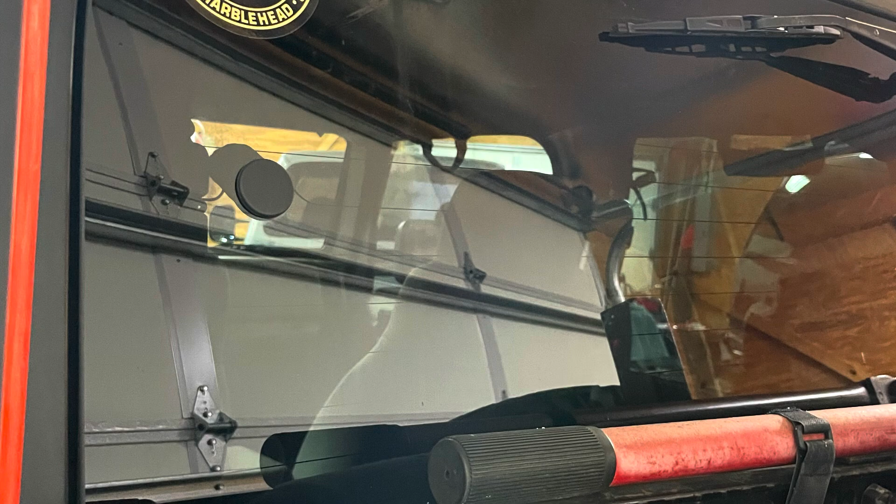Back out here in the garage. Some stuff came in the mail, so gonna get to work on some stuff. All right, here we go. Well, not stuff we're working on, but definitely putting that sticker on the Jeep here shortly. There's the perfect spot for that sticker.

All right, enough clowning around. Need to try to get a little organization going on here. Got like 3 projects on the workbench. Well, yeah, we'll call it 3. Gonna be getting the tank up here soon. So yeah, make some room to pull the tank off and put that up here somewhere. Yeah, see, it's getting better.

The key to disorganization is just continually push stuff down the bench. And the more you push it and just consolidate down there, you'll have some space to get the fuel tank up here. Yeah. Another organizing tip, keep everything in the same area. Got some diodes here. Lots of electrical stuff in here, so just kind of place those in there. And you're good. All right, enough yakking. Get that fuel tank off.

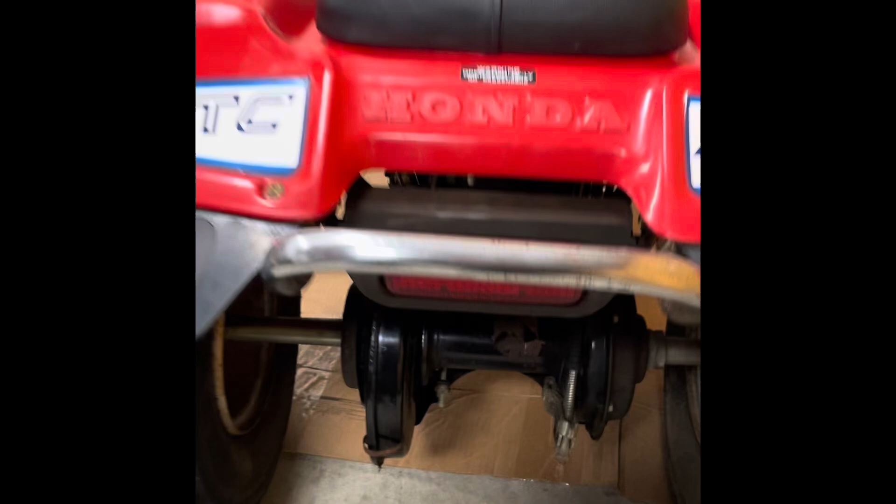All right, here we are, 185S time. Let's see here. Good cardboard in case we get a little fuel on the ground or whatnot. Anyhow, let's get the tank off. You got to pull the seat and fenders. There's a little lever there, and you give it a tug, and the seat and fenders shall come off. All right, there we go. Fenders off.

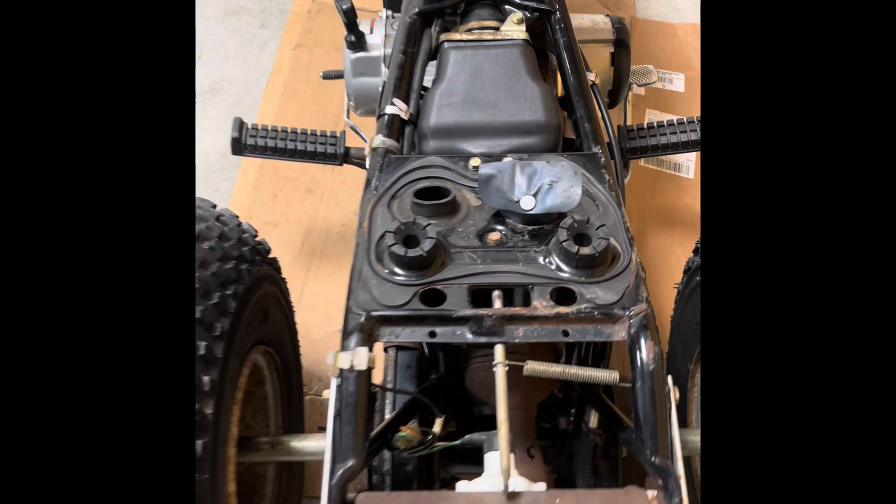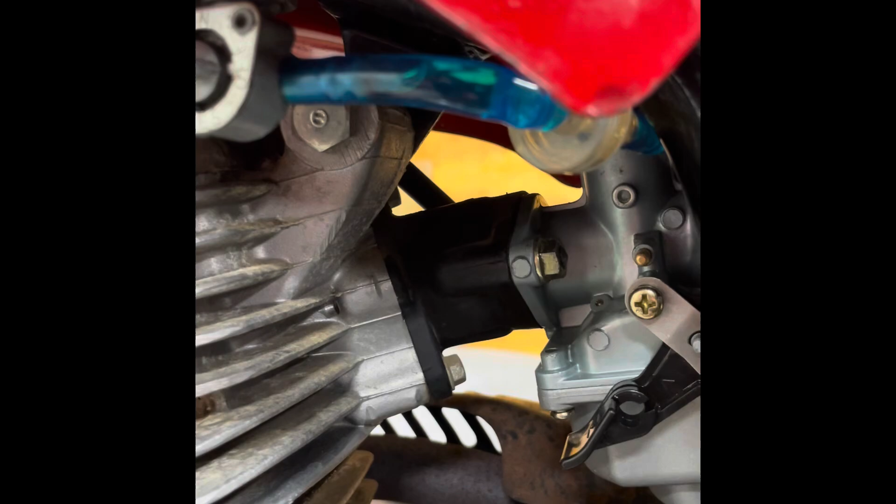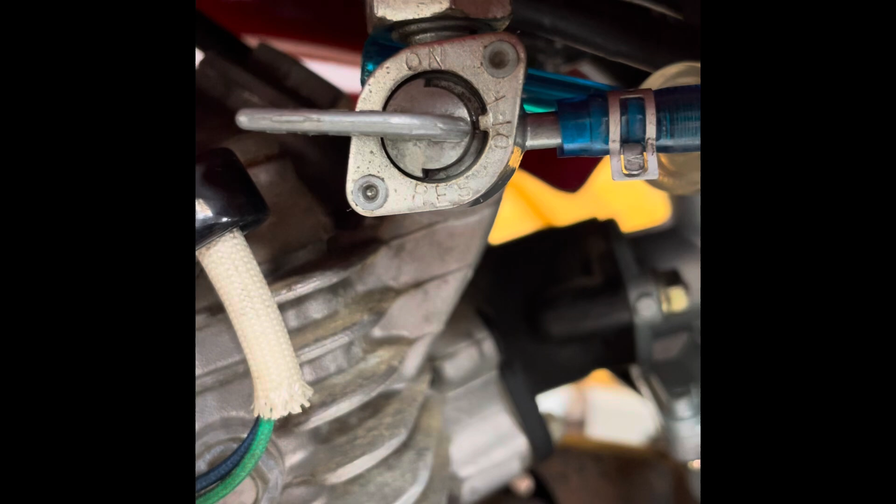Just a little mechanism there, got that bolt and fuel line going to the carb. Not a whole lot to it. All right, plot thickens. The off isn't really off. It's not shutting the fuel all the way off. So I usually like keeping the float bowls dry. So of course I cracked the drain over there from the float bowl and fuel came out because off is not really off. See what I'm saying? Yeah, got to take a look at that.

All right, 10 millimeter bolt is out. Should just slide right off here. Well, here we go. Got an old oil bucket cleaned up. Good enough for putting that fuel into the plow truck. I'll take that petcock off once I get all the gas out, see what's going on. Planning on doing the valves, so a little sidetracked here. The unexpecteds.

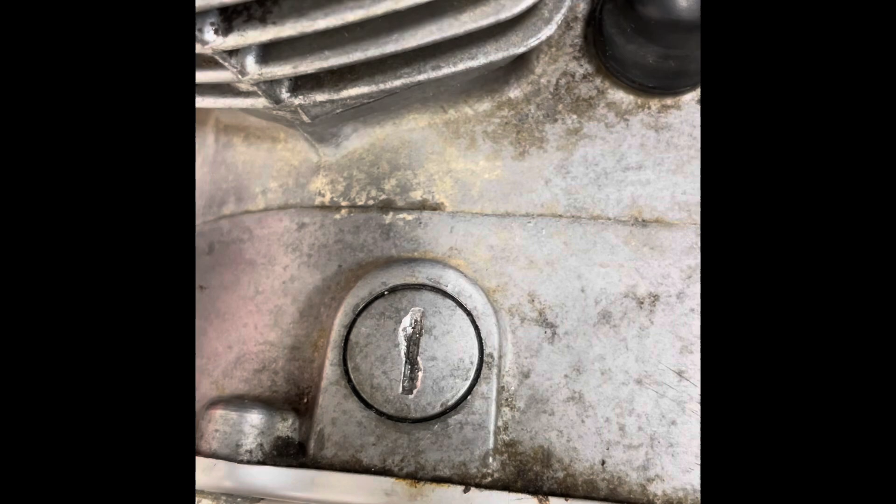All right, here we go. We got the factory toolkit right there. Get that out. Should be a wrench in there to remove these plugs. Intake and exhaust. And let's see, there we have it. There's our wrench. Get that out of the way. Also going to pull this plug off to see our timing mark. I'm actually going to pull the recoil off. It just makes it a lot easier. And the wind is picking up.

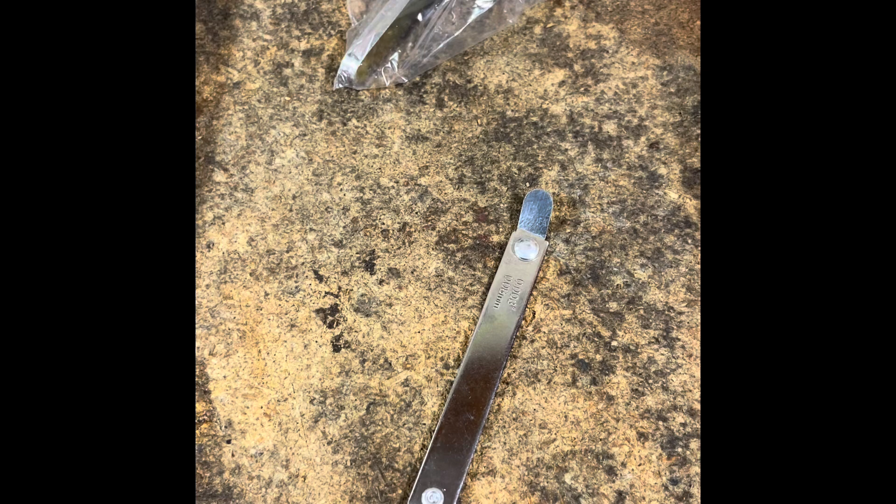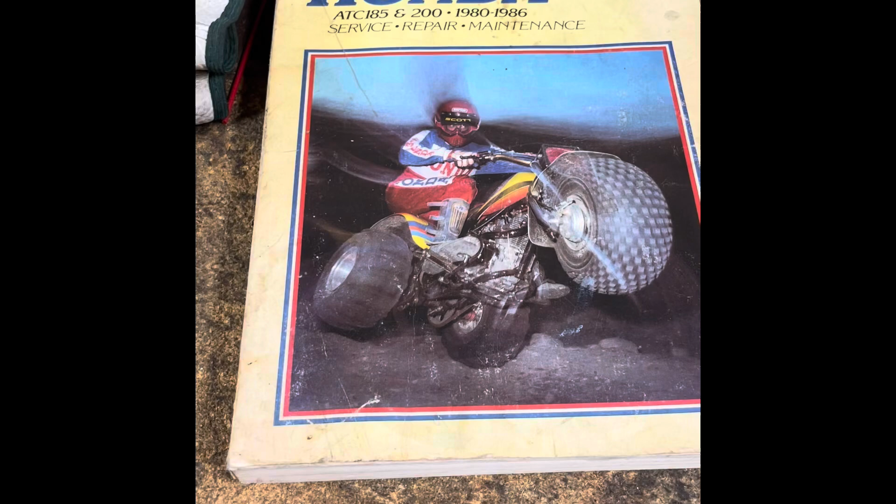All right. Got a new feeler gauge. Probably could have tweaked what I had, but hey, it was I think $6 or something, fairly cheap. Shopped around for that. That was the best deal, someplace in the UK. That intake and exhaust looks a little tight to get to, so I figured I'd give this tool a try. I got a couple new spark plugs, and I believe it's 2000s, intake and exhaust. I'll double check here in the old Clymer book.

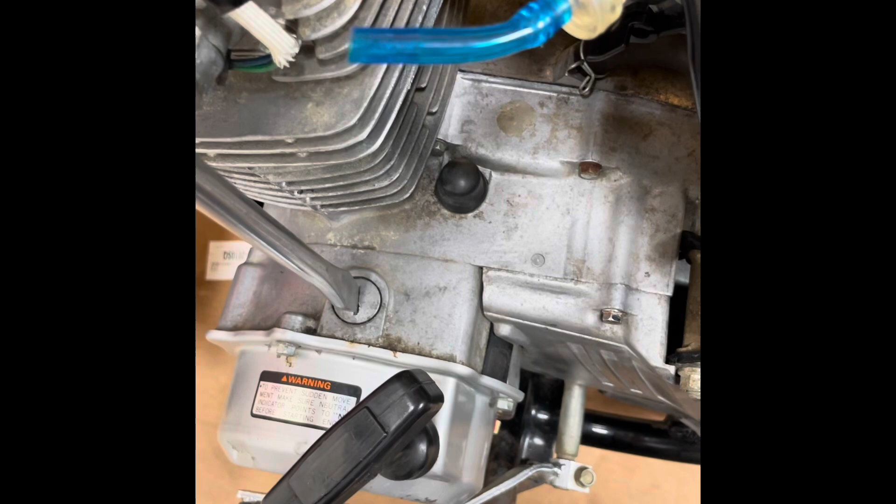All right, back at it. Made it back over here. Not messing around. I've had this stuff out already. I've already checked the valves, they're tight. Put some, I think either anti-seize or grease on this plug. It was stubborn. It looked like new, like it had never been off, and got a little boogered trying to get it off. It was definitely tight.

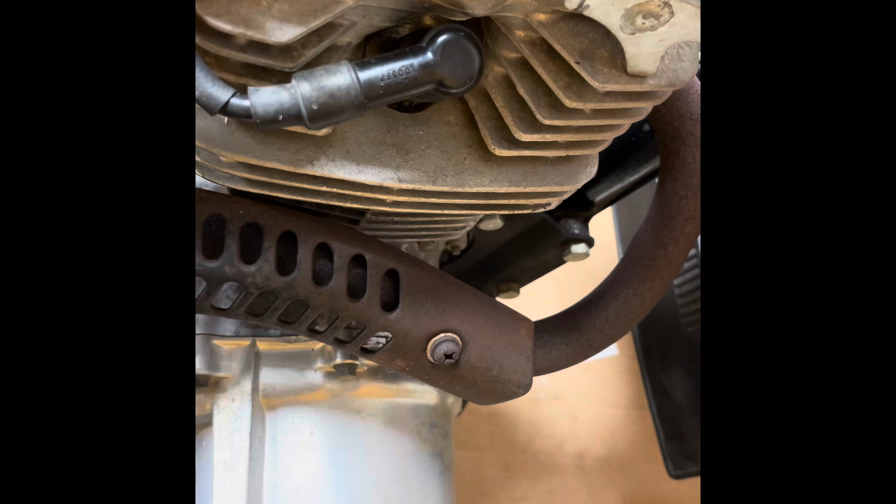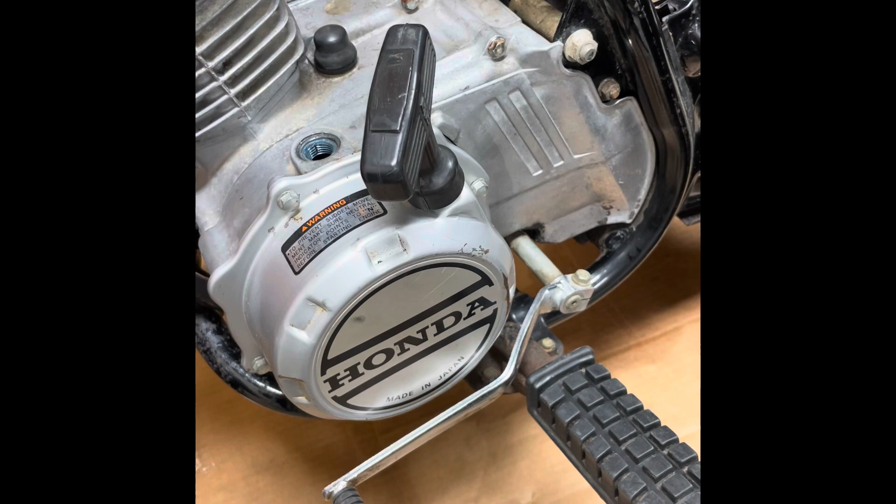Next, we're going to pull the spark plug out. Makes it a lot easier to roll over. Also in the toolkit, got the original spark plug wrench. Pretty nice. Like it. All right, spark plug's out. This says for size, one end says 19, the other one says P for, I assume, plug. Those spark plugs are a funny size. Not a normal 13/16.

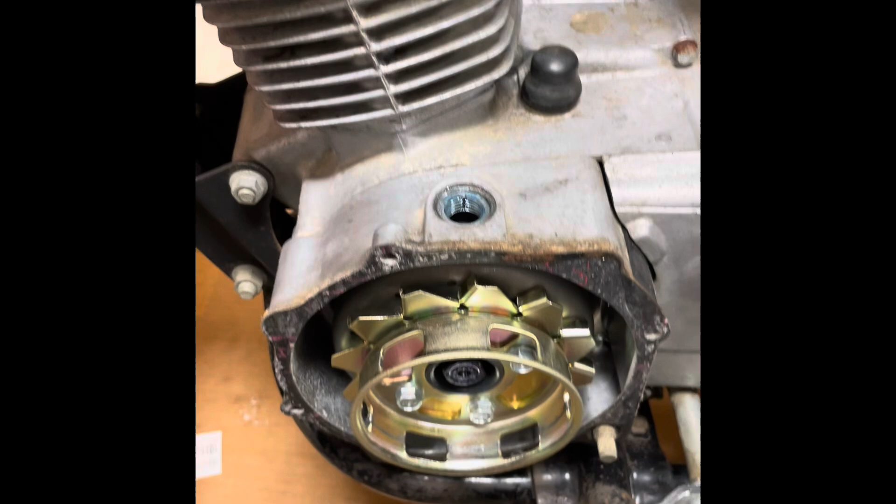Anyhow, 8 millimeter here, holding those on. You got your little neutral thing here. It's on a circlip, so before you go pulling them bolts out and jerking on stuff, let's get that circlip off there and that little neutral indicator. All right, the recoil's off, plug's out. Take that front exhaust cap off there, timing cap. That's off.

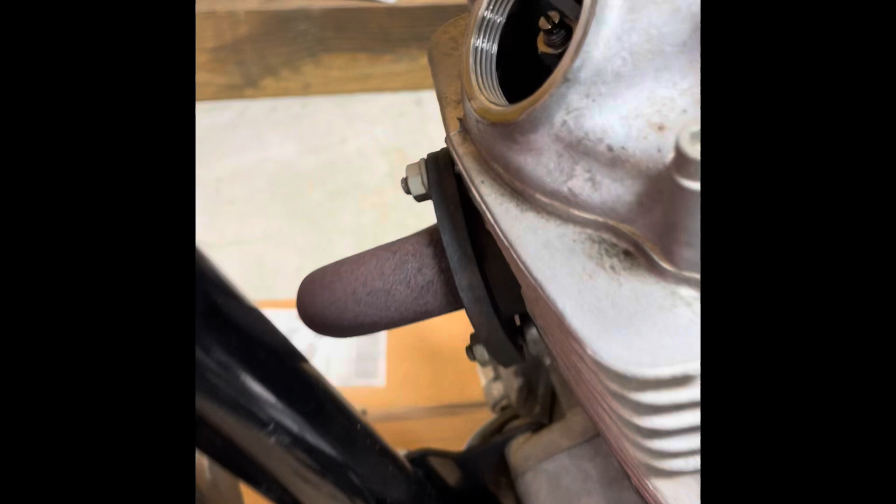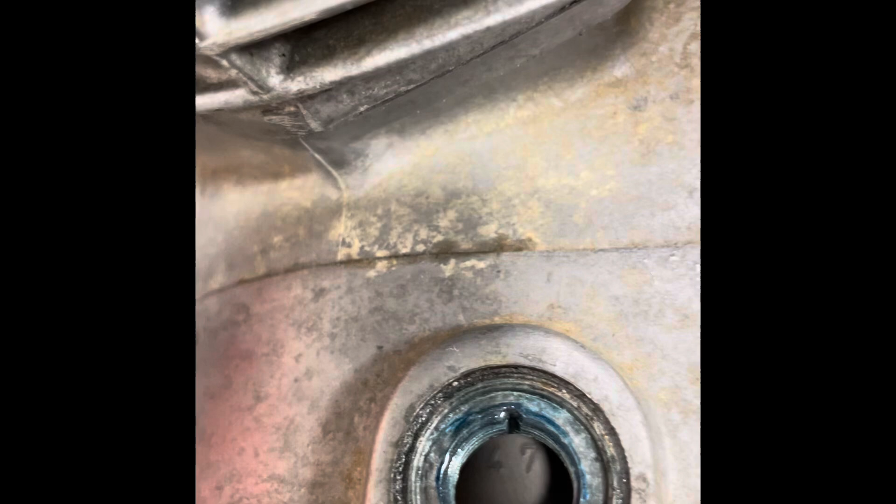Obviously it's tight right there. Yeah, I found it was easier when I was last checking these originally. Take that recoil off so you can get down here and kind of, you know, fine tune on it, you know. I actually had to stick a screwdriver in there to keep it from rolling.

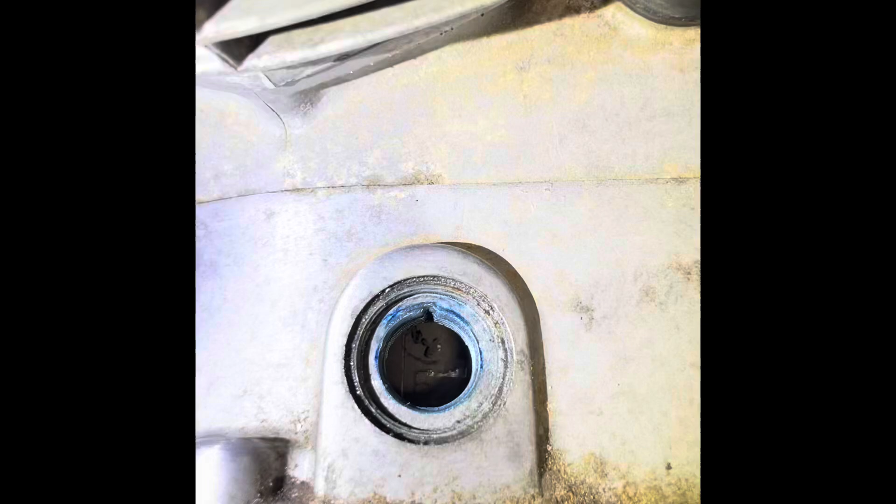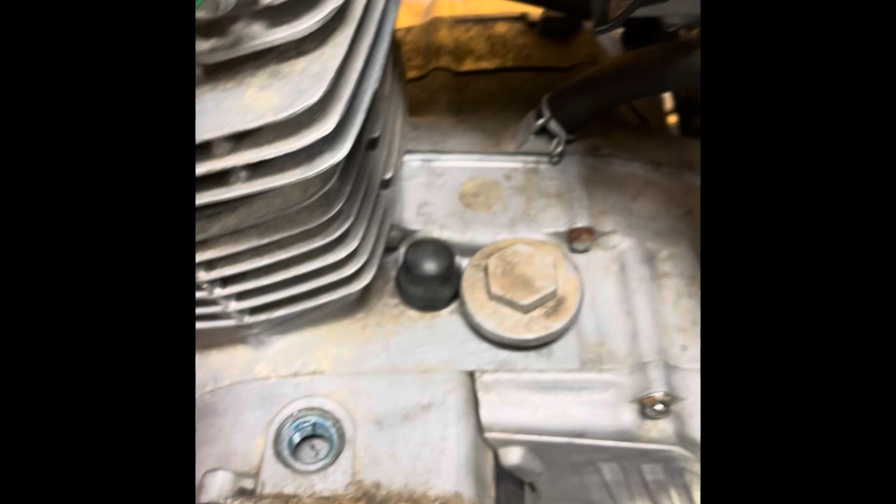Anyhow, let's get this back plug off for the intake. All right, you got an F in there and a T. I'm assuming the F's for full advanced, I'm guessing. Shoot it in the dark there. T's for top dead center. Either way, I got no wiggle room by hand on either one of those. I might be 180 out, so I'm going to spin it around 180.

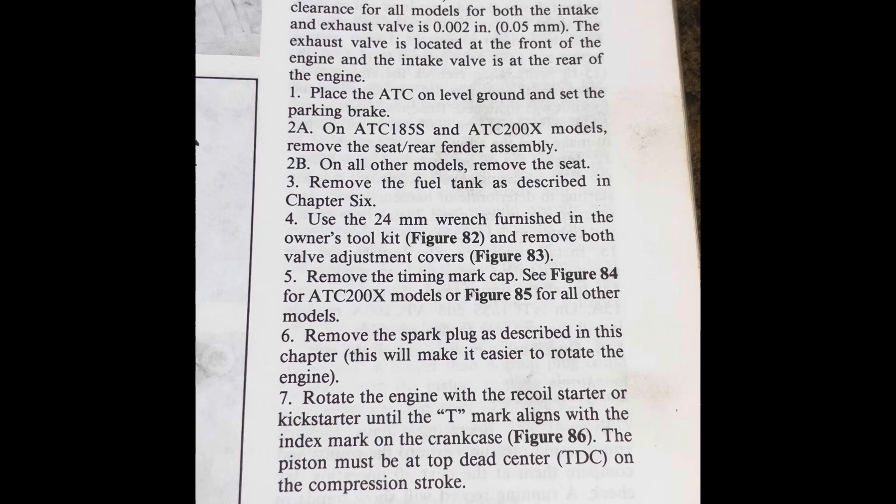Here's a quick rundown out of the book. You know, basically, you get free play in your rocker arms. You get it with the T mark there, as we're doing. And when I first picked this up, I checked it because that plug looked like it had never been out. That plug there. And I've rotated the engine a few times. I've never had free play in either whenever the T lands on there.

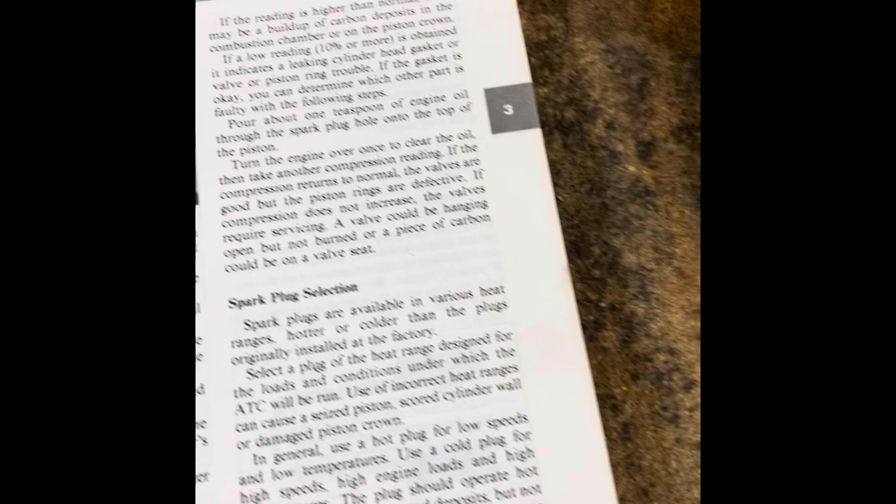So yeah, I don't think this has ever been done, but I'm gonna go look at the valves, see where they're at, and then, you know, I'll go from there once I see where the rocker arms are. I'm just gonna cycle through and watch the rocker arms move.

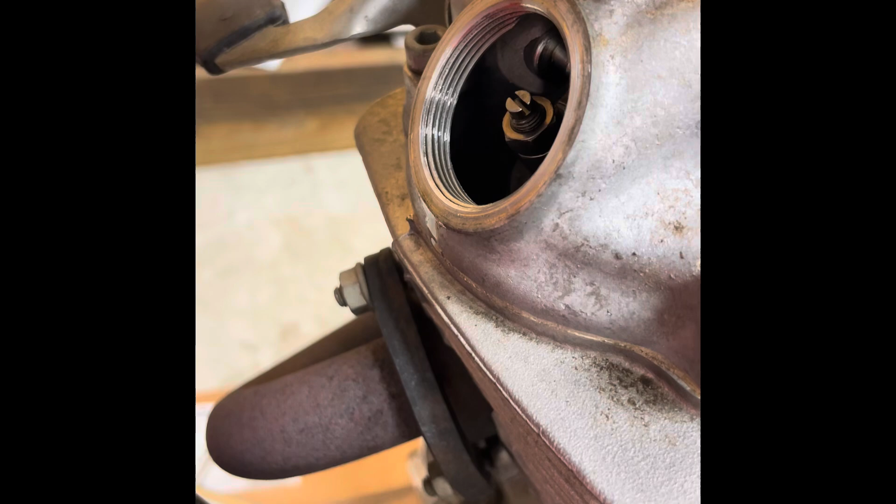All right, I got that screwdriver kind of holding that flywheel where it's happy there, and I get a little bit of movement out of that, not with my hands, but with those pliers, and so I'm gonna give her a little tweak with the wrench. I can't even get my fingers in there. That's gonna be try that tool in there and feeler gauge and just seat it and slide it out type deal.

Distractions. I tipped the tank over once it got enough out from the petcock, and yeah, a little bit of junk in there. The tank is fairly clean on the inside, but yeah, I guess that's good. It was full, so there's definitely a couple gallons in that bucket.

Oh, how do you put fuel into your uninsured plow truck? Like that. That's windy. Trick is not to suck up that garbage. Oh yeah, like a pro.

All right, Halloween's over. Didn't get around to doing the valves last night. Kid got off the bus, so it's time to go trick-or-treating.

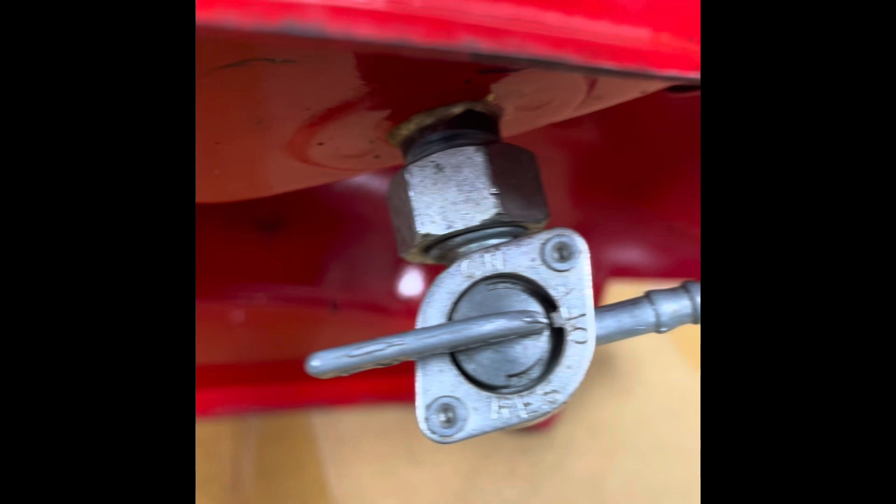Anyhow, called a friend, he's got some big reds, asked about this fuel valve thing. He said there's a seal in there. I never even looked up the parts catalog or looked in the book yet or nothing, but he said there's 2 screws. I'm gonna take a look in the book there, because if those are screws, those are awfully strange looking. Look at the back side. Yeah. Anyhow, kind of getting sidetracked on this tank. Need to head back over here and let's get these valves done.

All right, back over here. Took a little bit to get this wrench on there. It's fairly new. I just got it. But yeah, that thing was a little tight. I don't think that thing's ever been broke loose. All right, backed her off there. Ever so slightly got, you know, a little bit of resistance in there. It's 2/1000.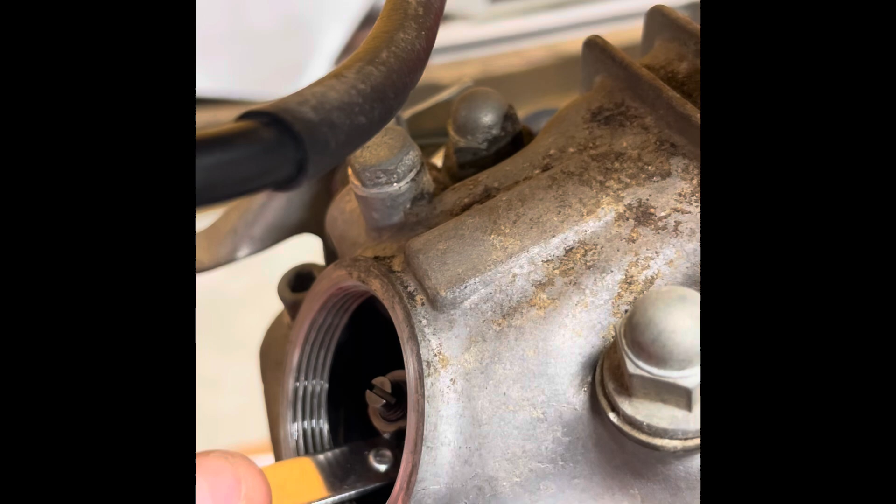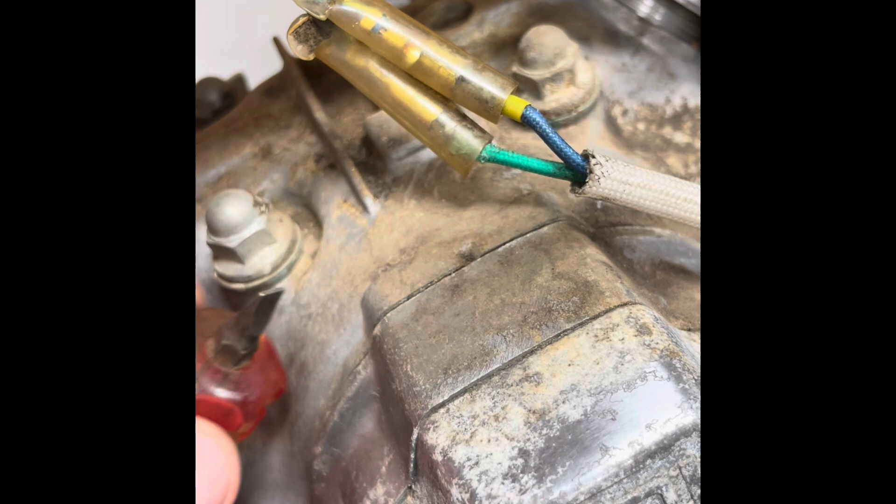I actually went and picked up these little screwdrivers years ago. Yeah. Anyhow, gonna snug that down and head towards the rear here. All right, get down in here.

Geez, sorry. Yeah, it's a little difficult here doing this, trying to film something like this.

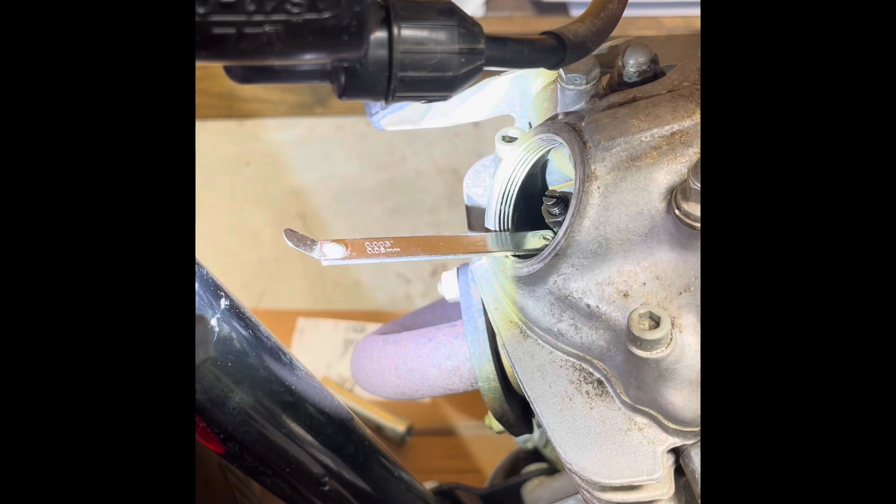Anyhow, got a slight amount of resistance on that one. I'm gonna go with that. This back one's gonna be fun. Look at that, obviously, that seems tight there. Then you look at that. Oh yeah, here we go. Again, that thing felt really tight. The jam nut, like it's never been broke loose. It's not something that gets tightened really tight, but definitely hasn't been touched in a long time, if ever.

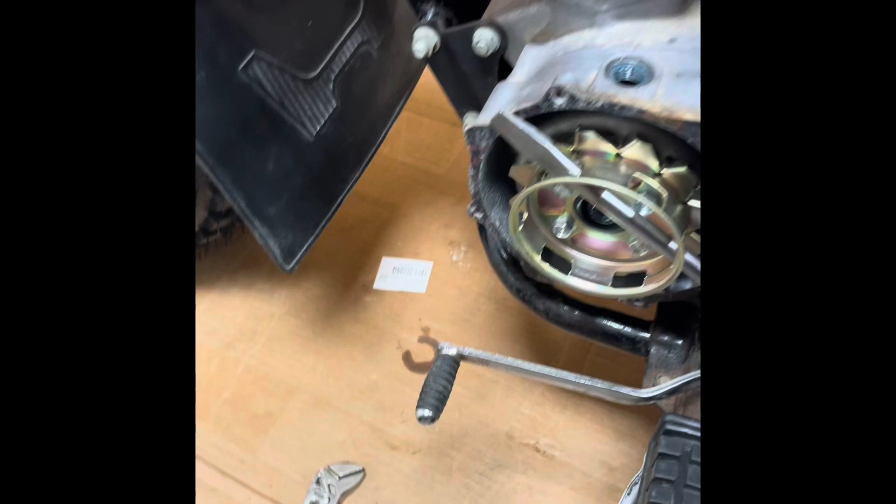All right, I think I got this. Now, with this pick, I've kind of tweaked this thing years ago for snap rings. Anyhow, with this pick in the slot of your tappet adjuster there, and just a 10mm wrench, pretty sure I got it. That tool, I didn't even bother with it. Let me try sliding this feeler gauge out. It's got a little bit of tension on it from what I can feel. It's a little bit of resistance.

Okay, got it. I had to tweak that tool to get in the rear one. Pretty tight. I tried cutting down a longer one I had. That didn't work out so well. So I ended up bending up that tool, which was like $6 or something on eBay. And I use these needle nose, kind of like this here.

And you can feel also between the two of them. They're both 3000s. You can feel the resistance, about the same, just tweaking on it with your hand there. There's not much movement. It's a pretty tight gap. Anyhow, gonna snug these caps back down and get the recoil back on.

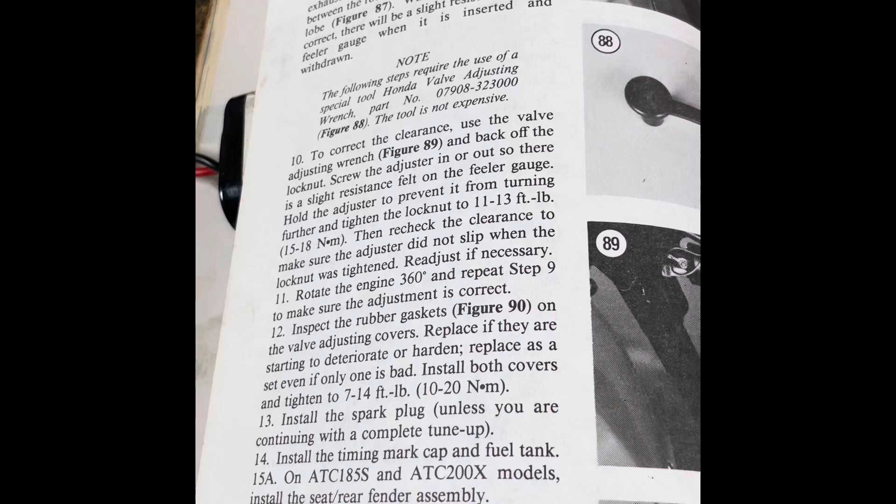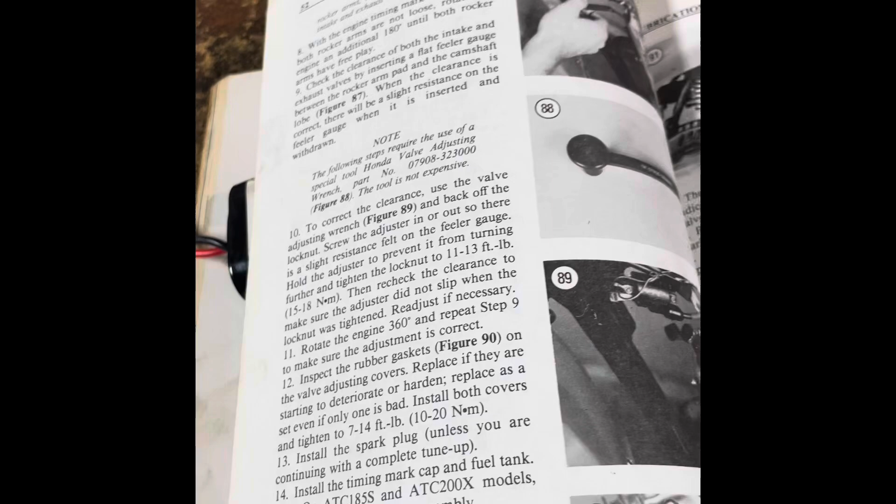All right, reassembly, spin the engine around. You torque those adjuster jam nuts to 11 to 13 foot-pounds. The cover says tighten 7 to 14. Snug those up, those got no ring on them. Anyhow, this tool here, great. Would work on the front really good, but on the rear, I think you'd just struggle.

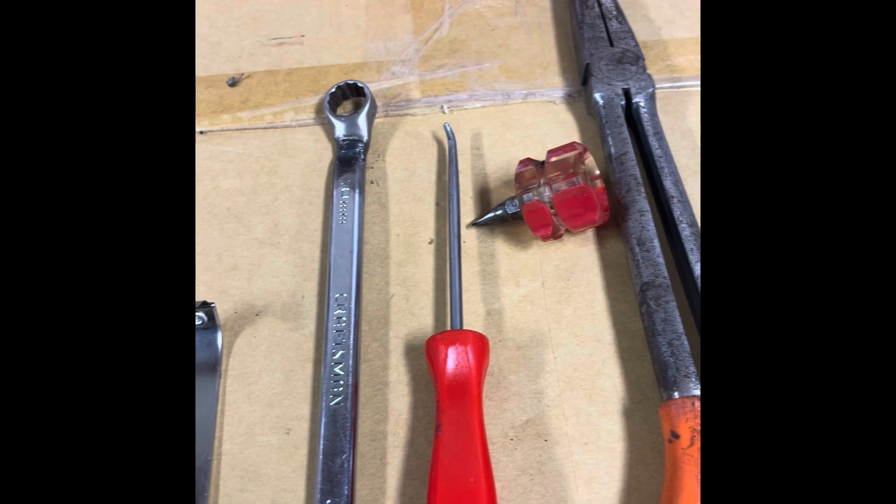I found using this pick that I've trimmed up, and also that screwdriver on the front, and just this wrench worked good. I did have to tweak that feeler gauge. So yeah, I don't know if I'd spend the money on that tool. If this is your first time doing it, I'd go with something like that. Probably buy a couple of those feeler gauges, about $6 on Fleabay. I'm gonna take a look in the book here and see what's up with this petcock.

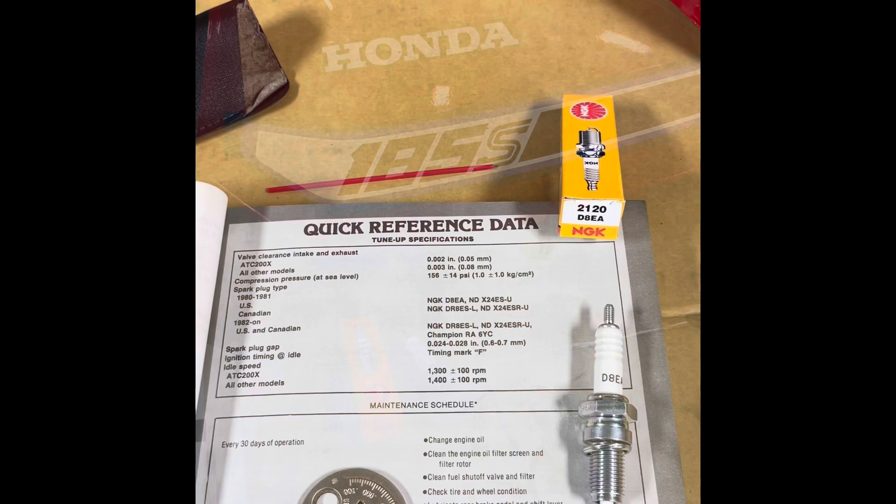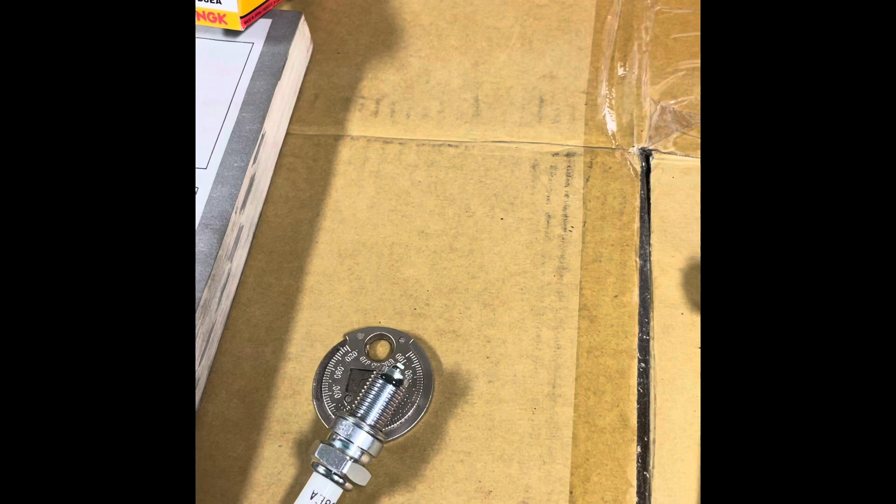All right. Also, I forgot to mention, I'm going to throw a new plug in it. I had to order these also, D8EA. It's not something they got around here in town. Looks like our gap is .024 to .028. So we'll get that gapped up. I just smear a little anti-seize on the threads, not a lot, just a little bit. There you go, just a little. A dab will do, you don't need to be the Tin Man on a spark plug.

All right, got to wrap this up. Yeah, funny, huh? Anyhow, we're here with the old three-wheeler.

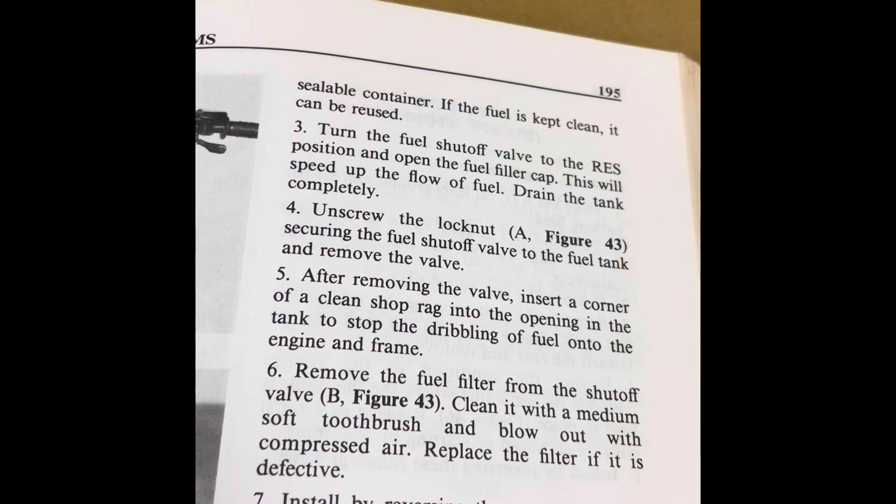All right, here we go. Look at this fuel valve here. Talks about the cleaning of the filter, just removing the thing from the tank. This one here, I guess that could be a difference between the big reds and these older models. They're all old. The 185 and the 200, maybe the 200 big reds, I think they got the same tank as a 250, so there's probably a change there.

But I had an old '71 350 Honda, and you could dismantle the petcock. It had a little filter bowl on it, from what I remember. But those look like rivets. So yeah, that thing bypassing like it is, I'm gonna get on the internet here and see what's available.